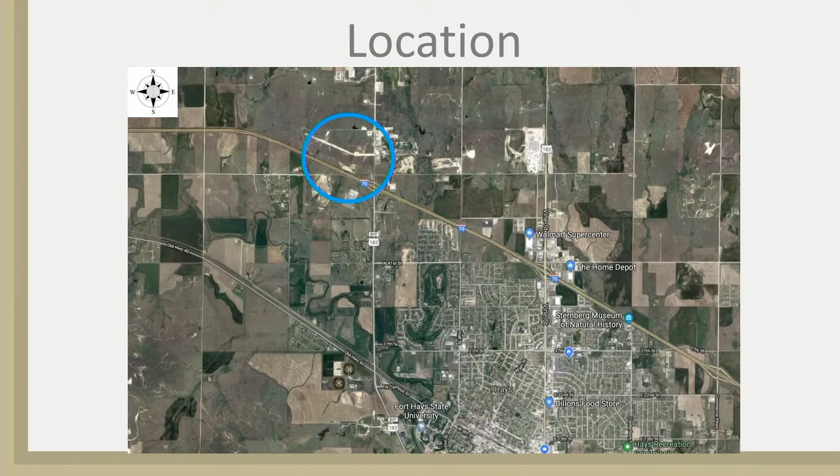Good evening, Jesse Rohr, Director of Public Works. This first item tonight I want to discuss is the consideration of the final plat of the Hess First Addition. This property is located off of exit 157, northwest of Hays. As you have been through lots of different processes with this property, you'll know that this is the final step in the development process and will allow subdivision of the property. Previously, annexation and zoning were completed by approval of the City Commission.

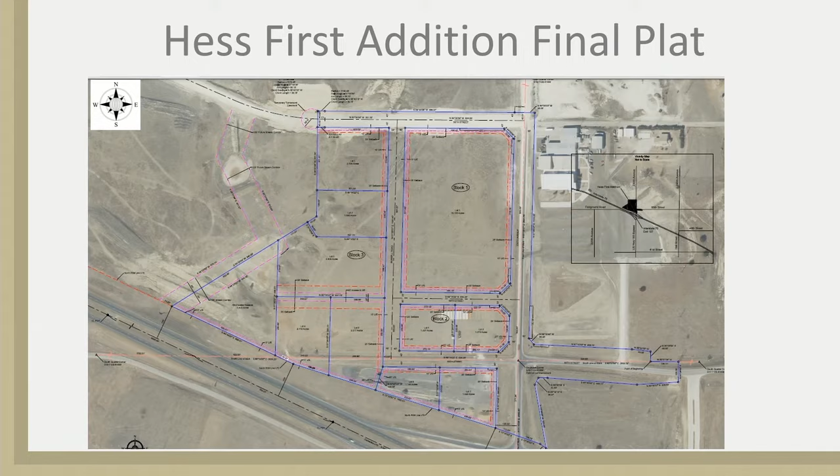The final plat does consist of 10 lots available for development. The plat is designed to allow for commercial uses such as restaurants, hotels, travel centers, and other similar commercial uses to accommodate the traveling public along I-70. The area proposed has been annexed into the city, and when it was rezoned, it was zoned to C2 Commercial General District.

Here's another visual of the property. Without the satellite imagery, the interior streets within the development will be constructed to city standard and accepted by the city for future ownership and maintenance when complete. All easements are in place for future placement of any required utilities.

This plat also shows the area dedicated for permanent stormwater best management practices, or BMPs, down here on the southwest corner of this triangular lot. The stormwater from the developed lots will be directed to this area where it'll be controlled through engineering management design before it crosses under I-70.

This final plat, as drafted, does meet all the requirements of the current subdivision regulations in regard to lot size, setbacks, and all other specific utility requirements.

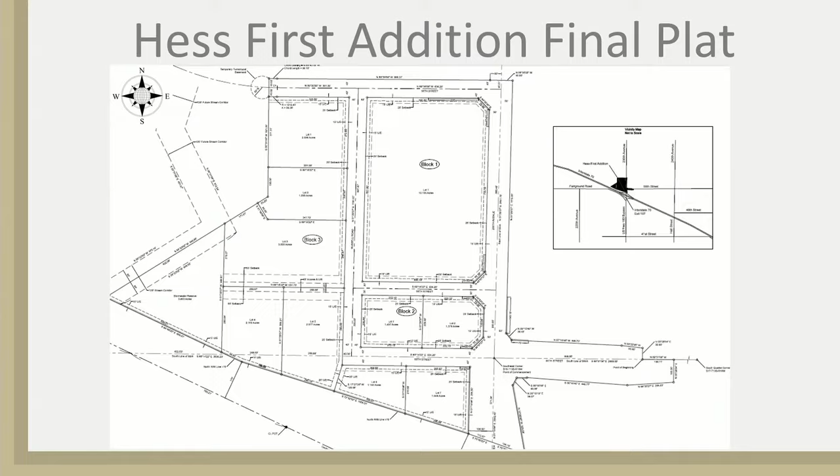So as when any final plat is brought before you, you have these particular options: either approve as submitted, request any further changes or additional considerations to the plat, or do not approve the plat. This plat did go before the Hays Area Planning Commission on January 20th of 2020, and the Planning Commission did approve the plat as submitted and as was recommended by city staff. This will be the action requested, and with that, I will take any questions.

I'll make a motion that we approve resolution number 2020-007, accepting the final plat of the Hess First Addition. I'll second. Motion and a second. Any comments? All in favor of the motion, say aye. Aye. Opposed, nay. Passes 4-0.

Next item on the agenda is slope mower award of bid. The next item I want to discuss is an award of bid for a slope mower for the Stormwater Division. The 2020 budget did include funding for the purchase of a slope mower for stormwater maintenance. This is a picture of the current 2010 Jacobsen mower handed down from the Parks Department a couple years ago. It's made to mow primarily level ground or nearly level ground, and not made to mow the steep slopes that it's been used for the last couple years.

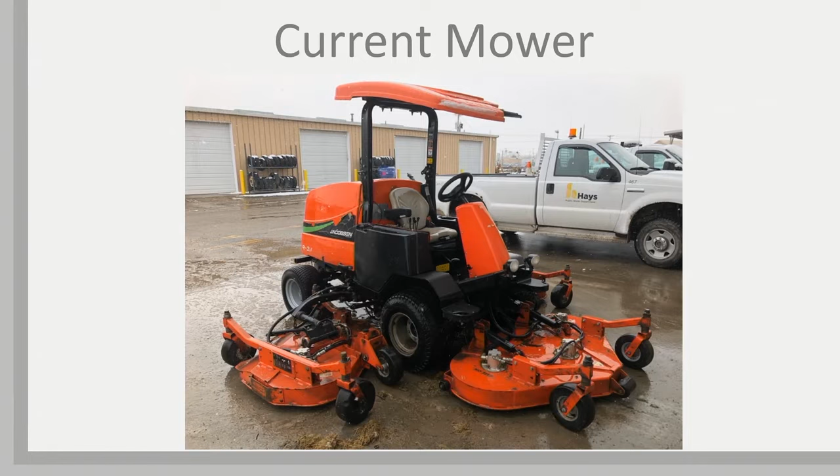Because of this, there's lots of extra wear and tear on the mower in place because it's mowing areas it shouldn't be mowing. It's also not safe for the personnel running the equipment. The plan with this particular mower is to keep it around to mow level areas, the tops of the draws, and other flat areas that are mowed by stormwater.

Throughout late last fall, early winter, staff did demo 4 different units, including the one proposed as pictured here. One of the 4 was a remote controlled unit, and the other 3 required operators on board. All 4 of them were tested in one of the steepest draws that are mowed, Chetolah Draw along General Custer behind the Vine Street Dillons. Only one of the 4 was reluctant to get in the draw and mow the steepest area. The other 3 did, including the remote mower and the other 2 operator mowers.

This recommended mower, what they call the Harper ATM 72 LC, that stands for all-terrain mower, 72-inch cut, liquid cooled, had no issue mowing any of the areas and appeared to be the safest mower of all.

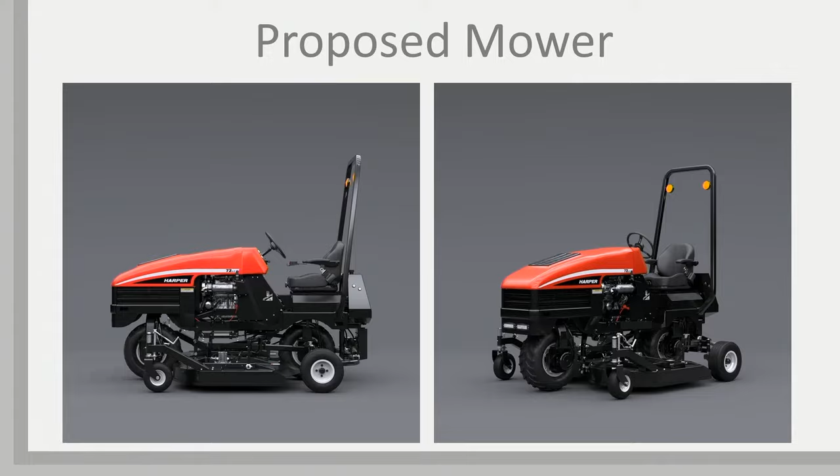This particular mower carries a 3-year, 3,000-hour warranty. It has a liquid-cooled 3-cylinder diesel engine. You can see in the imagery here how the mower itself is kept level when on a slope.

We checked with other jurisdictions that operate these particular mowers and found out Fort Riley actually operates 7 of these units. We also talked to a private contractor who does work for Fort Riley and has his own unit, purchased after one of his operators slid their previous mower into one of their lagoons. They love the mower, they've had no issues with it, it works well for them, it cuts well, and they've had no safety issues like they did previously.

Jesse, I have to comment before you leave this picture. It's the strangest looking thing sitting over there. But the bigger point is the guy driving it. You must get comfortable with it pretty quickly because he's not leaning uphill. Yeah, he's settled in.

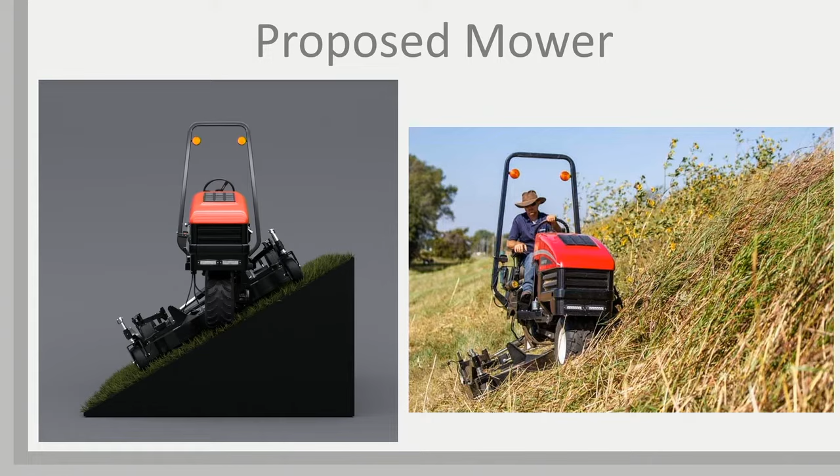Yeah, I agree, and I'll talk about that a little bit more from when our operator actually ran the mower.

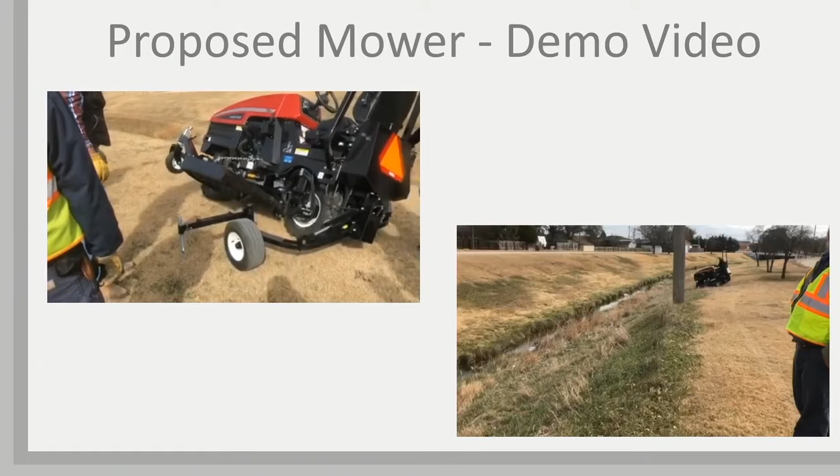This little video clip shows how each deck is maintained. It's actually connected to the unit. It's tilted, and you can change blades and work on the bottom of the deck. Really slick process.

The other image here shows them actually mowing in the draw behind Chetolah. To be honest, it was slightly uncomfortable watching him go down in that draw, not knowing the capabilities of the particular mower. However, the operator had no issues, as you can see, getting down in the ditch.

Eric Borger, our stormwater maintenance operator, also took control of the mower. He got on it, and the learning curve was very quick. He wasn't on there for more than 5 minutes before he got down in the draw.

In one of the other demos we had, the only thing that stayed level on that mower was the seat. It was on a kind of swivel, and the operator said it was like sitting on an exercise ball while trying to run a piece of equipment. Other than getting a good core workout, he didn't feel too comfortable with it. So we felt this type of mower, keeping everything level except the deck, was the best situation for the operator and the machine itself.

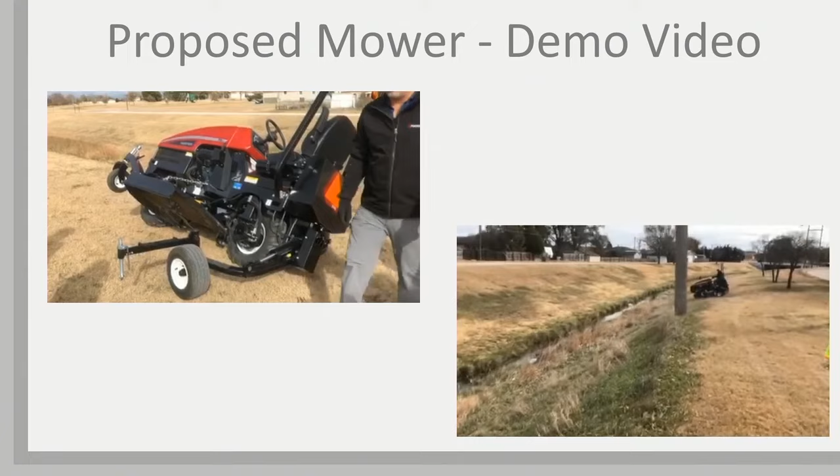There was one qualified bid received, from Great Plains Motorsports of South Hutchinson, in the amount of $46,882.81 for the Harper ATM 72 LC.

In the 2020 budget, we budgeted $70,000 out of the stormwater management operational budget, new equipment line item, and this bid comes in just a little over $23,000 under budget.

I want to mention that last week we had a question about the blades on the mower. This particular mower has 2 sets of blades available: a swinging blade for taller grasses and small brush, and a fixed blade for finer cutting of shorter, thinner grasses. The bid includes 2 sets of each blade, so we'll have the ability to try them both. The contractor in Fort Riley primarily uses the swinging blade, and they're so happy with the cut that they don't even bother with the fixed blade set. But we'll have the ability to try them both and then use whatever works best for us.

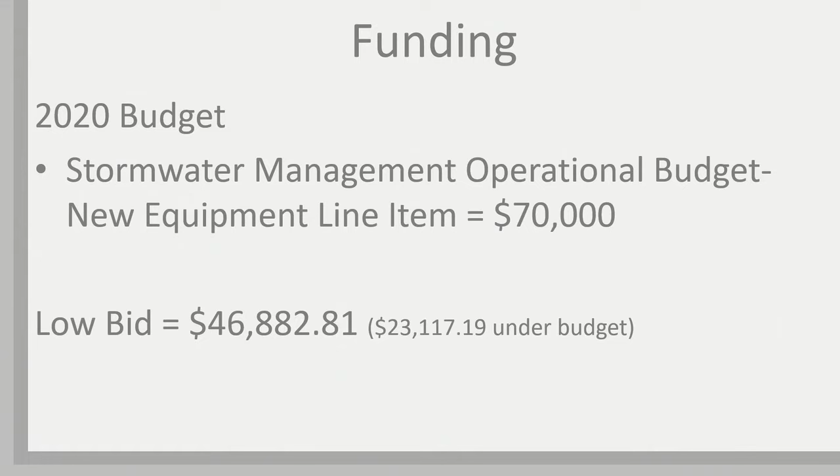Your options would be to award the bid to Great Plains Motorsports as recommended, reject all bids, or provide staff with other options. This would be the action requested.

I move we award the bid for the purchase of a new Harper ATM 72LC slope mower from Great Plains Motorsports of South Hutchinson in the amount of $46,882.81, to be funded out of the stormwater operational budget new equipment line item. I'll second. We have a motion and a second.

Just have a question on the budget, such the gap on that. Were the other ones that you looked at quite a bit higher?

They were. I know one ranged slightly less than this, but it did not meet the bid specs, and that was the one that was actually a little reluctant to go down in the draw itself. When we demoed other units, there were some that got up to the 60,000 plus range.

One of them we had actually looked at last year when we budgeted for this item isn't even made anymore. They weren't selling, and that was closer to 70, so the budget amount is 70,000. We were very pleased to find this one for that budget amount and its capabilities.

Have we bought anything from this company before? I've never heard of it, but I know Public Works has not, and I'm not sure if Parks Department has. They will do all service work out of their location in South Hutch. This brand has dealers all over the place, and South Hutch has this region, so any maintenance will be performed by them if necessary, and they stock the common parts as well.

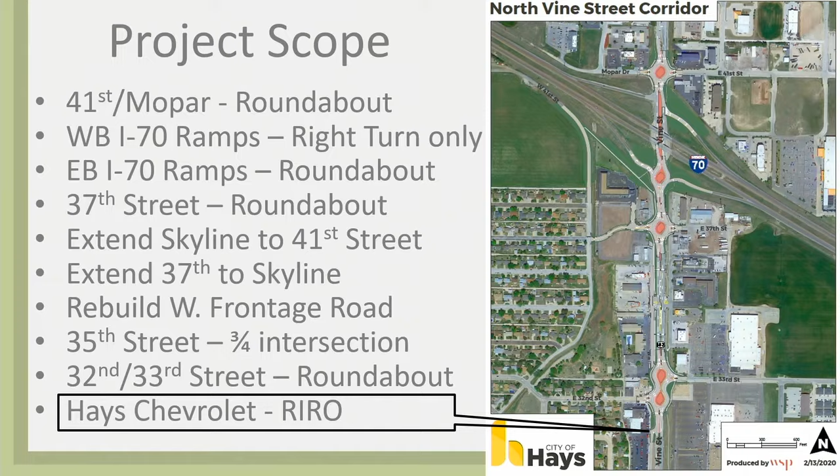As far as schedule goes, the project is currently out to bid with KDOT. There's a March 25th bid opening. If you're so inclined, you can Google bid letting March 25th KDOT and find the project, download the plans, and see who's bidding. It's 405 sheets of plans if you're interested.

Once they have the bids, we'll be coming back in April for concurrence on the award of bid, and there'll also be an agreement for construction inspection at that time. We anticipate construction to begin sometime in May of this year, with construction being completed by the end of the construction season in 2021, November timeframe.

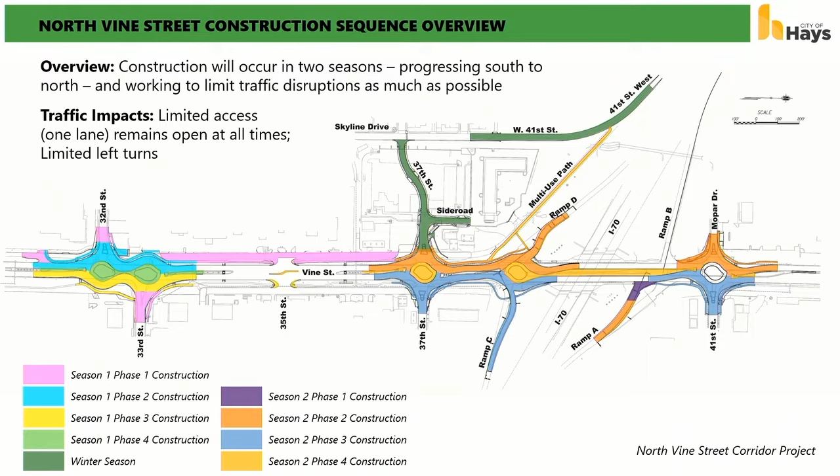The main thing I wanted to talk about tonight is the sequencing of construction and traffic through construction. The project is broken down into 9 distinct phases of construction spanning 2 construction seasons. Season 1 has 4 phases, beginning in May of 2020 and running through November of 2020. Tacked onto the end of Season 1 is what we call the winter phase, which will construct the extension of 37th Street west to Skyline and the extension of Skyline up to 41st Street during that November to April timeframe.

That allows us to do some work during the winter without running the risk of having winter weather impact traffic on Vine Street. If we have to shut down for a month because of snow or extreme cold, it won't affect anybody by doing the work in this area of the project.

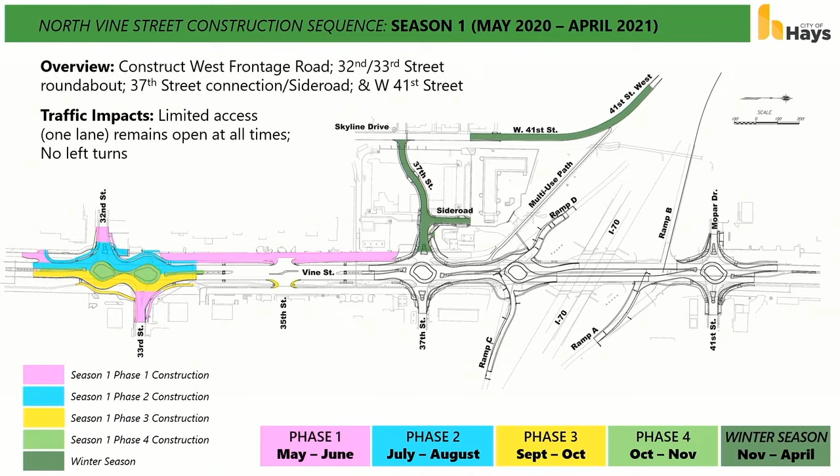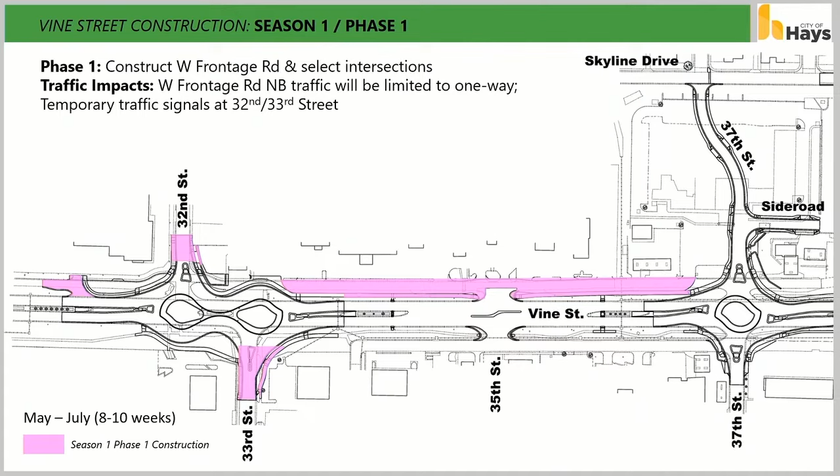So the first phase, which runs from May into mid-July, is approximately 8 to 10 weeks in length. And the first area to be reconstructed is the east side of the west frontage road.

Moving north along that west frontage road, the connection at 35th Street is closed while they're doing the construction.

John? Yes? Can you back up? One more. No, the next one back. Back. There we go. Yep.

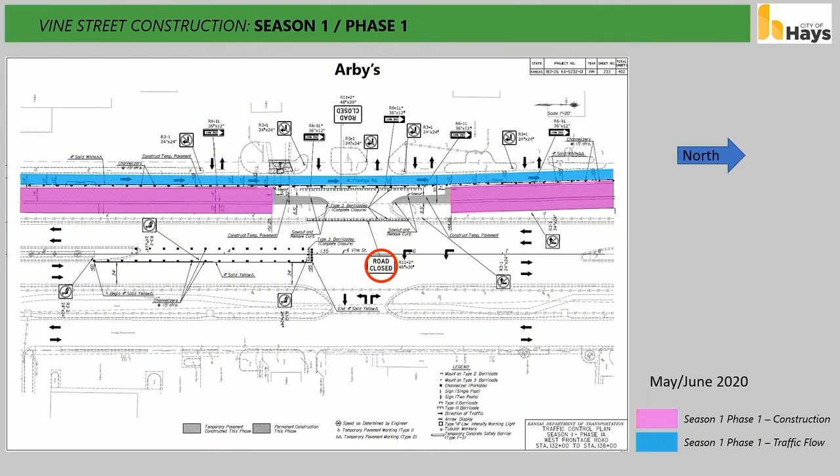So you're saying phase 1, it's going to be one way right there by Pheasant Run. So you got 2 lanes going into one. Is that on the left side they're going to be? Yeah, they will be driving down the left side of the road.

We actually went back and forth with the engineer. Originally we had it one way southbound. But what we discovered is that if somebody wanted to go to Freddy's or Arby's or Whiskey Creek, and they didn't turn back at 37th Street and drove past it, there's no good way to get back. This way, you drive past and say, oh, I wanted to go to Arby's - well, you can go. So we made it this way; it was kind of after the fact, but in the process we originally started the other direction and decided to go this way because it was more forgiving to the unwary traveler. Good point, makes sense now. Thank you.

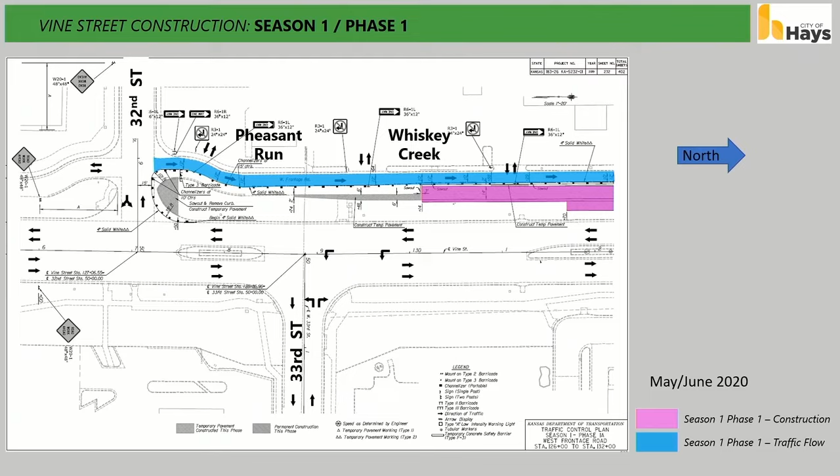Moving on, continuing north toward 37th Street, traffic is still one way northbound, and everything else is normal.

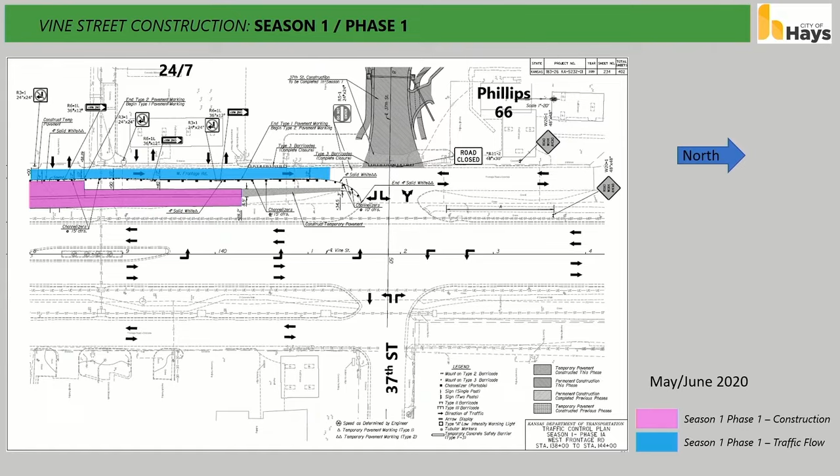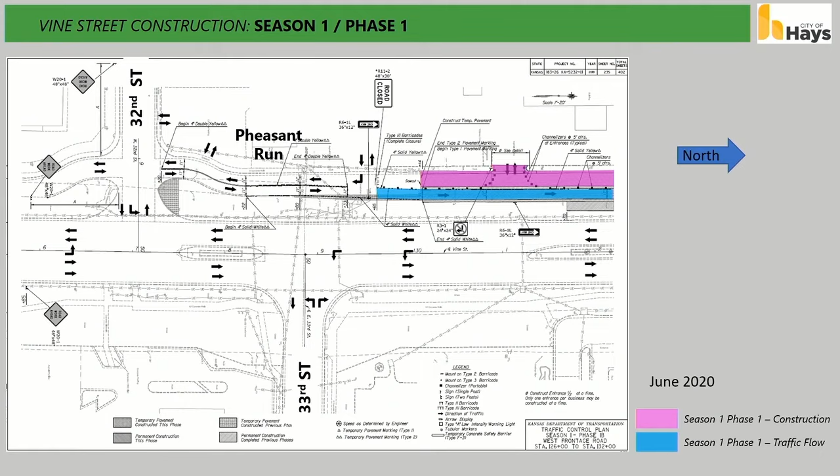After the east side is constructed, traffic will be moved over onto the new pavement, and they'll be reconstructing the west side of the frontage road. Traffic is still one way northbound.

As construction occurs along that, all the entrances to the individual businesses will be phased. It may look like it's being blocked off, but they'll always allow access to get in and out of those businesses, building half entrances or having one entrance open while they build the other, so access is always maintained along the frontage road.

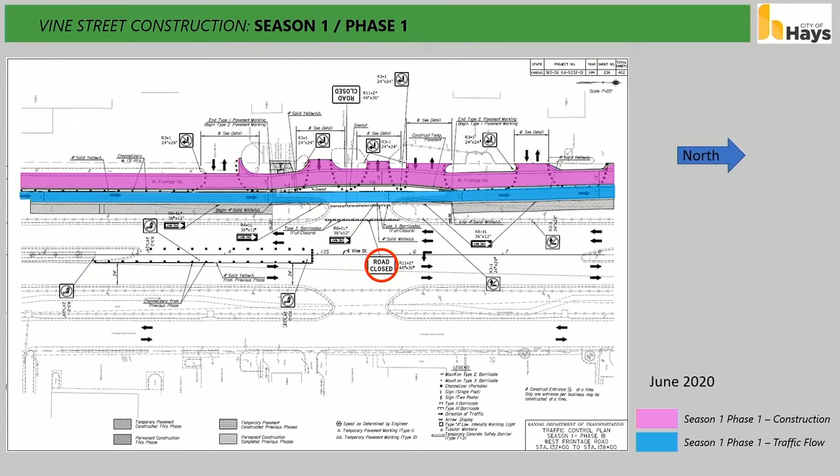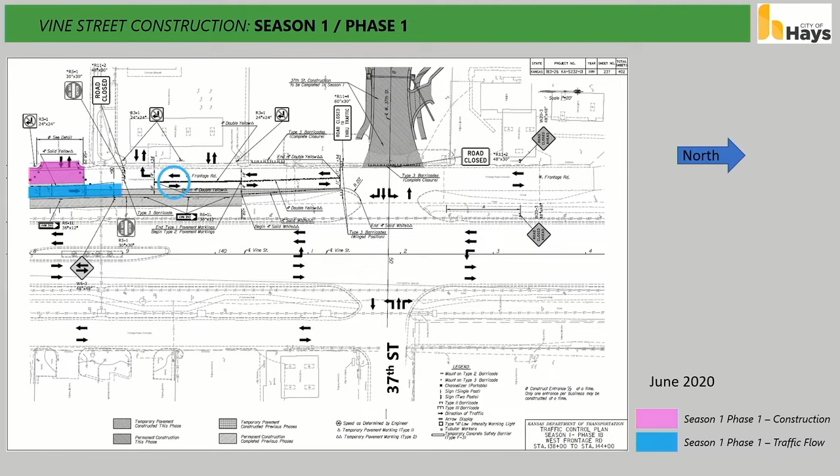During this phase, we do allow a little bit of two-way traffic to access the 24/7 there at the north end of the construction zone.

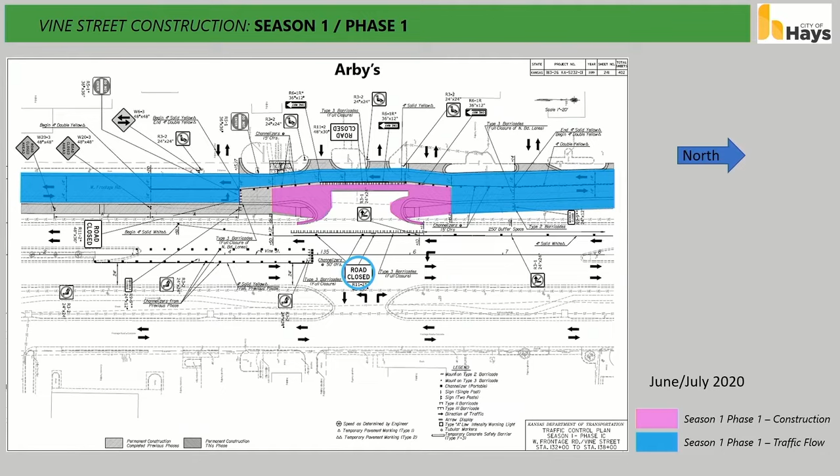The third step in the west frontage road construction rebuilds the pavement right at the intersection of 35th Street, in front of Arby's, widening it out to allow for the eventual three-quarter intersection configuration.

Also during phase one, work begins on the right-in, right-out entrance to Hayes Chevrolet and the disconnection of that west frontage road from 32nd Street.

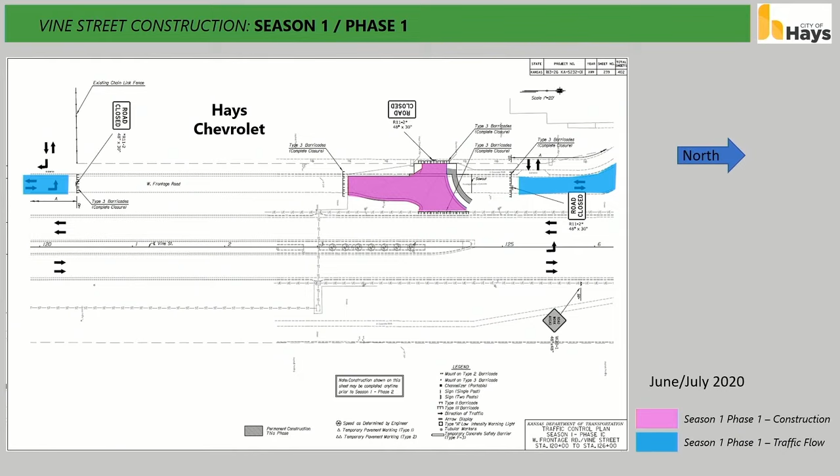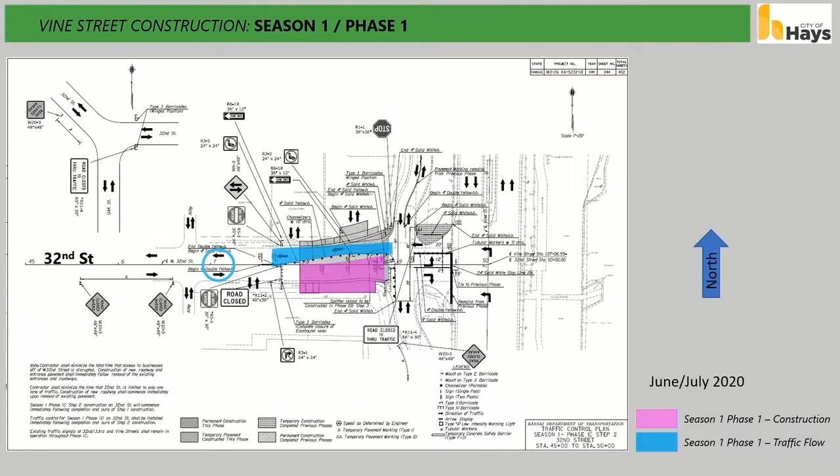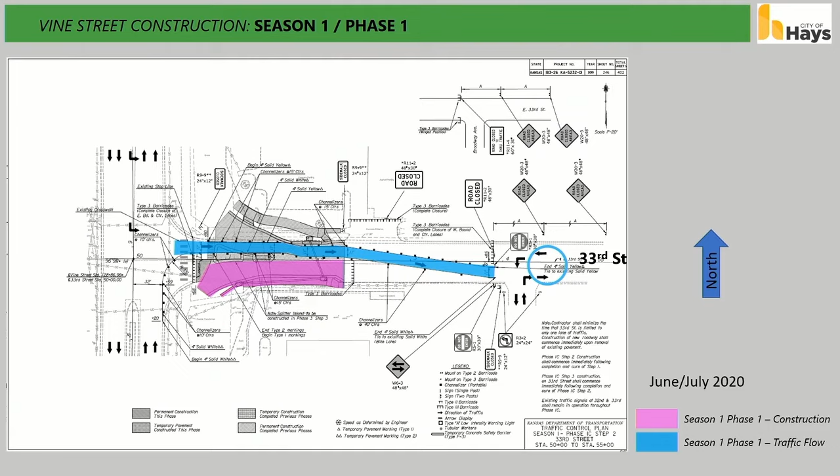The last thing done during phase one, which is still phase one of nine phases, is terminating the west frontage road at the south end there by Whiskey Creek.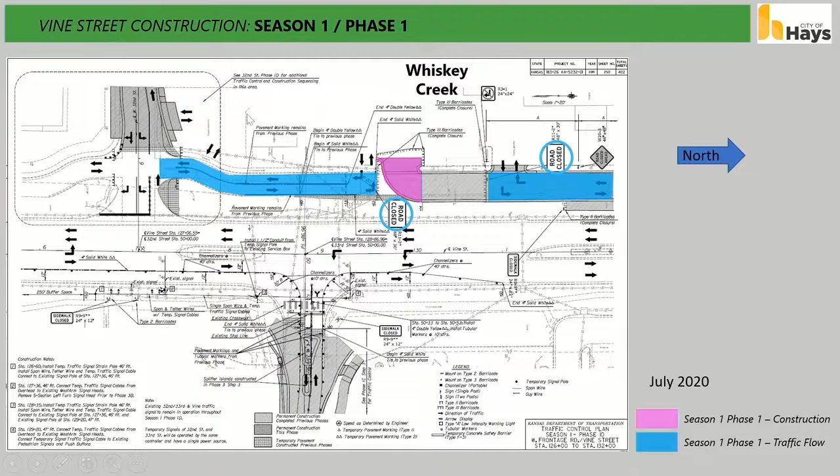Which moves us into phase two. So now we're in mid-July. Lots happened in the last two months, but we're moving out onto Mainline Vine Street and starting to build the west half of the 32nd, 33rd Street roundabout. This phase will take us through August, lasting about six weeks.

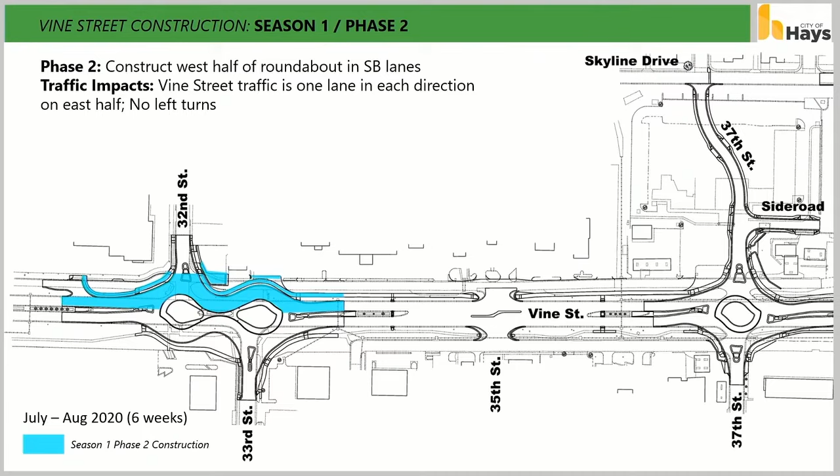This slide shows how the west side of the 32nd Street roundabout will be constructed in steps to allow access to 32nd Street. After the steps shown here, traffic will be shifted to the south onto the new pavement, and that gap will be filled in. During this time, all entrances and access along 32nd Street remains open.

We've got two-way traffic. You'll notice that the Vine Street traffic here now has been shifted over to the east side, so it'll be one lane head-to-head. Southbound traffic transitions over at 35th Street, moves over to the east side. When it gets down to 29th Street, it shifts back over to the west side like normal. You'll also notice there's some temporary traffic signal light configuration there to allow for better flow of traffic at those intersections during construction.

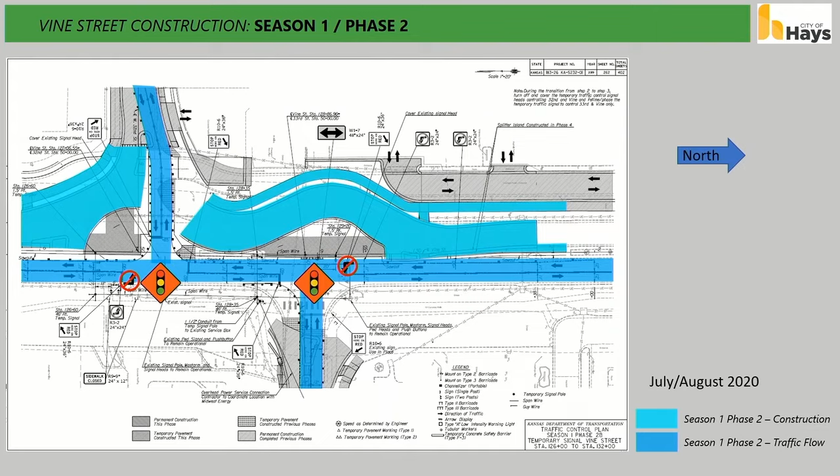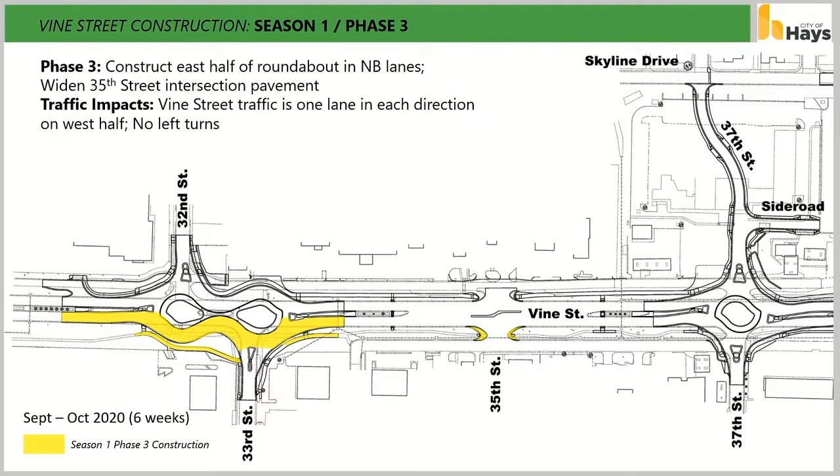After the west side is built, they'll start building on the east side roundabout. This phase will take another six weeks from September through mid-October.

Similarly to how the west side was built, the east side will be constructed in steps, allowing 33rd Street traffic access during construction. Here you can also see that the southbound Vine Street traffic will be running in the outside lanes of the new roundabout, the curvy part, while the northbound traffic cuts through the center on some existing pavement, some new pavement, and some temporary pavement.

The intersections with 32nd and 33rd Street will be controlled with stop signs at this point, and there won't be any left turns allowed. It's kind of obvious how you won't be able to make the left turns during this phase of construction from either 32nd Street or onto 32nd or 33rd Street.

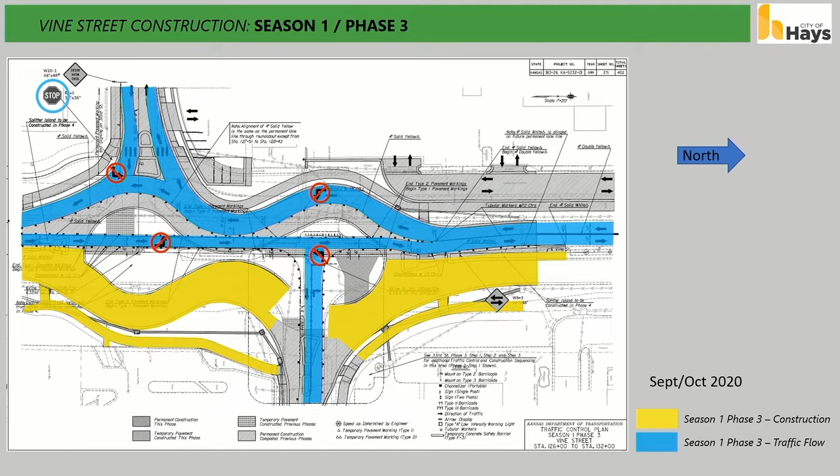That brings us to the fourth phase during season one, which constructs the center islands and the splitter medians. This will take about four weeks, mid-October through mid-November, which would be the November 20th milestone for completion date for season one.

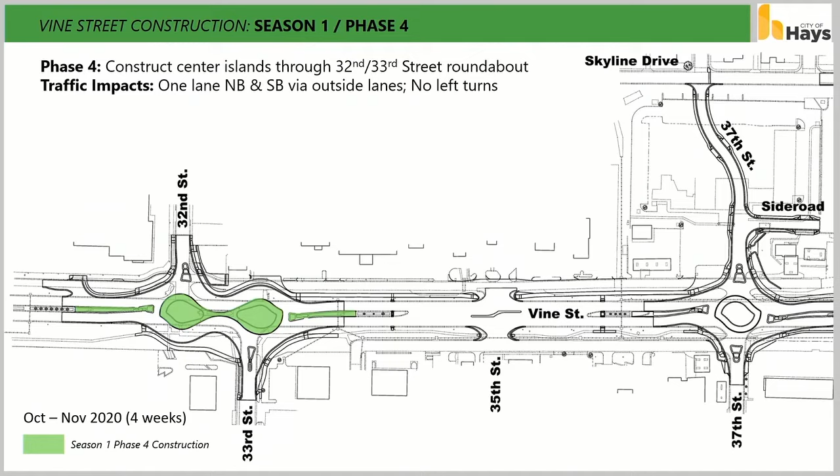Here you can see that during this phase of construction, traffic is split and pushed out to the outside lanes to allow room to construct the center islands. Like the previous phase, 32nd and 33rd Street intersections will be controlled with stop signs, and left turns will not be allowed during this particular phase of construction.

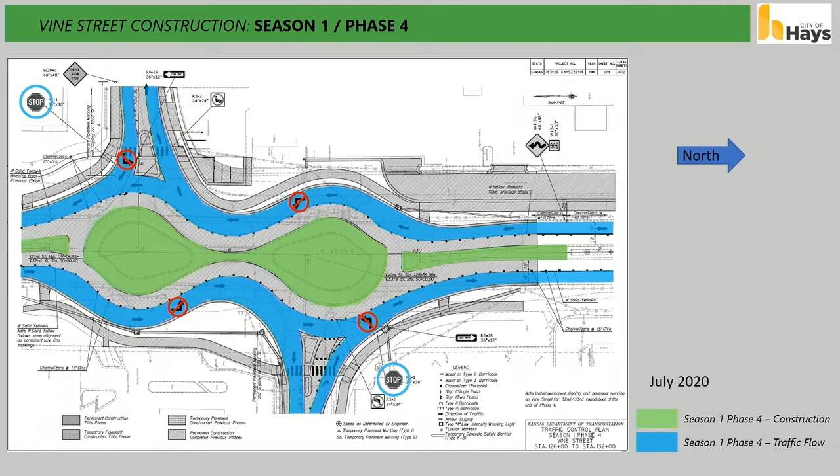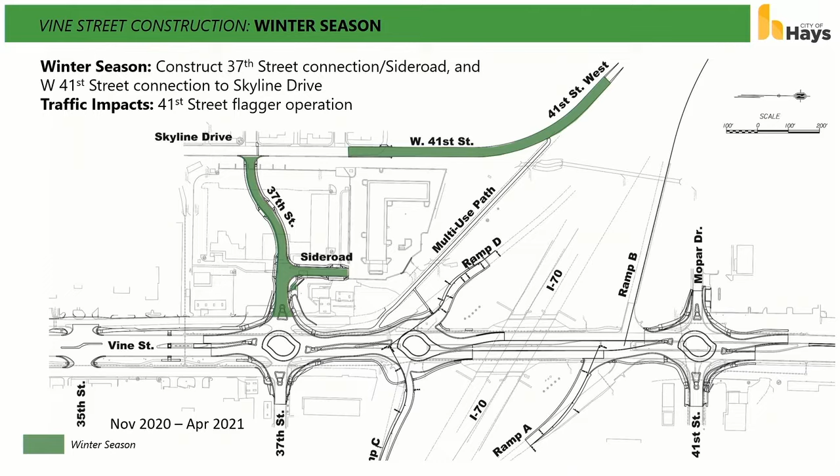After all of the season one mainline Vine Street work is complete, the contractor will begin the work to extend 37th and 41st Street as we previously discussed, November through April. This completes season one and all the winter work, taking us to April of 2021.

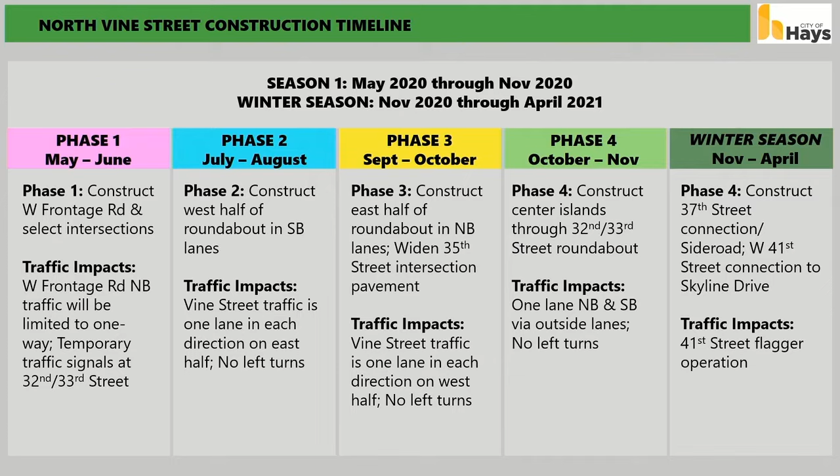I have a question, I can ask it at the end or now. Are you going to do a demonstration like this for all the commercial businesses impacted along this area? We will be having a pre-construction meeting, and I think that could be part of it. It might be something we can handle individually with some businesses. Short answer is yes, whether it's in the pre-construction meeting or a separate meeting. I think this is very important to do as soon as possible with those businesses, because I think back to when we redid 8th Street and got ahead of it with the businesses, and they were able to do signage and make changes. When they had the time to do that and understood where they needed to put that signage, everything made sense.

And I've got a slide at the end of my presentation, but you've also got in front of you the front side of a handout, a flyer that explains it. On the back side will be a detail for every single phase. So as we go along, the front side can stay consistent, but on the back side it'll show traffic control.

My slide shows an example from phase 2 of season 1. Every time the traffic control changes, we'll have a new configuration in the back. We'll have those available, printed out, for businesses to have, and we can provide them to the media to talk about.

My concern is I think they understand what's going to happen, but I'm not sure I would understand the timeline that goes with it even after seeing it a lot. That's really important so they can react. I think there's a lot of positivity on Vine Street, people are getting excited, though there's some nerves, as there would be. If they can get ahead of it with signage, it could solve a lot of that trepidation.

That's a question I have, Joe. We get a lot of travelers that stop in Hays going from Kansas City to Denver, we're definitely a pit stop. If I've never been to Hays and want to get the best pancake in town, or a Freddy's hamburger, how simple is it going to be if I know nothing about Hays to get to these places?

If I drive into Hays and see all this construction, I'm like, oh my God. How are we going to do signage? We did that on Vine Street down by Dillon's, and I remember there were very clear signs.

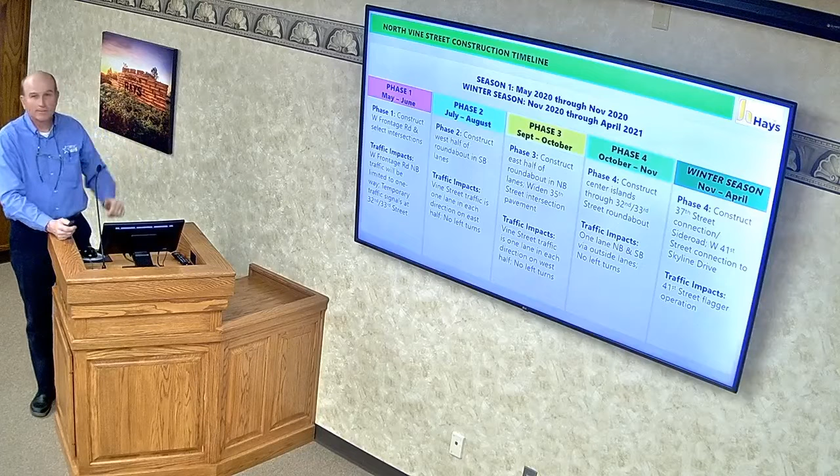So I'll continue on with season 2. There's less... how many slides... seasons, I'm tired. Again, I'm tired. You know, we had a watch party for the show, season 1, or no.

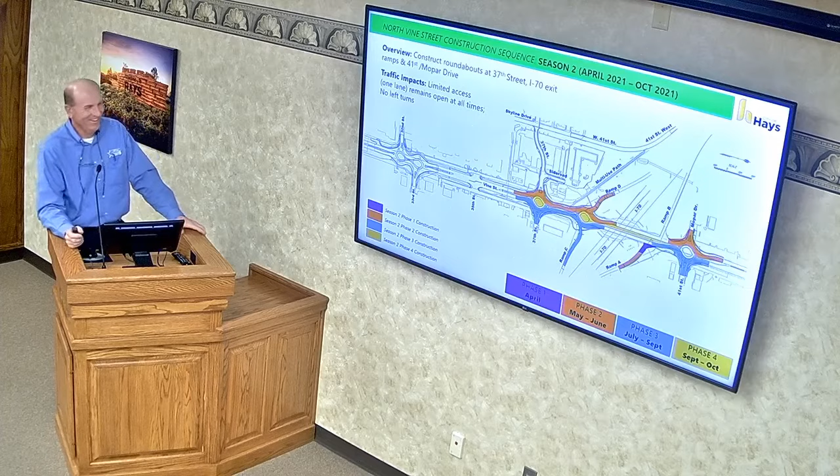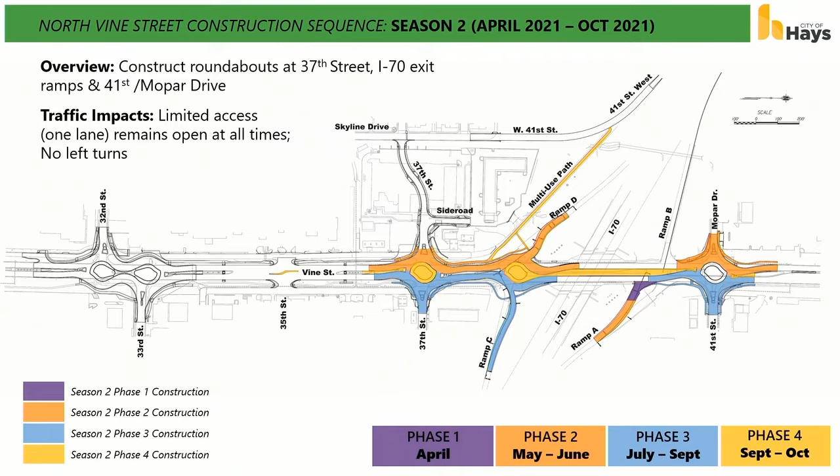Season 2 includes 4 phases as well, concentrated on the 3 roundabouts around the I-70 exit 159 area, and that runs through October of 2021.

Phase 1 doesn't look like much on the map here, but in addition to a little bit of new pavement at the westbound off-ramp, there's also some other temporary work going on at the other ramps and a few other locations. That's preparatory work for subsequent phases.

I want to note that during this whole project, we're not touching the westbound on-ramp, what we call ramp B. All 3 other ramps will receive some level of modification.

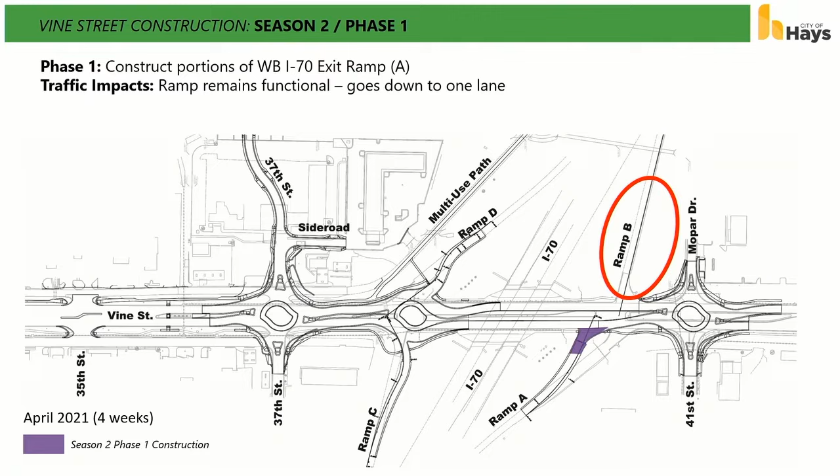Phase 2 dives right into construction of the west side of the 3 roundabouts, and it lasts about 8 weeks, all of May and June of 2021.

This is the north end of the project. 43rd Street is on the right side of your screen, and traffic is reduced to 1 lane and switched over. We'll take out a portion of the median and switch traffic over, so it'll be head-to-head with traffic on the east side as they're constructing. The 43rd Street intersection is still controlled by its signal lights and functions normally.

South of the construction zone, traffic is returned to normal at 35th Street. Northbound traffic wanting to access the east side frontage road won't be able to make a left turn here because of the congestion caused by combining the 2 lanes. So traffic wanting to access these frontage roads will need to go down to the new roundabout and come back, then they can make that right turn into the east side frontage road.

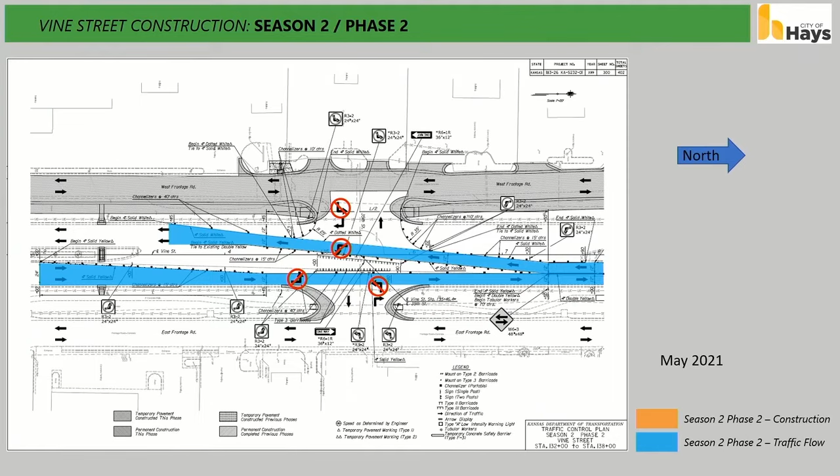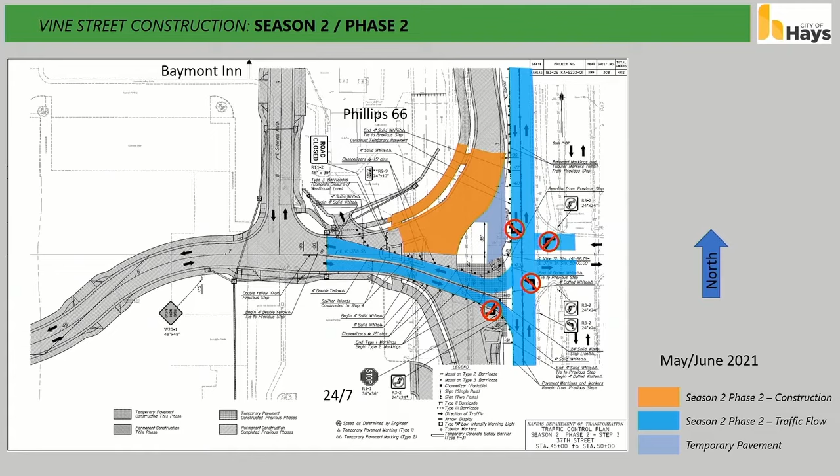The next 2 slides show how traffic is phased through the construction of the intersection at 37th Street. I've rotated the slide, so north is up, but similar to the way the other roundabouts were, we shift traffic around here. We actually allow for both east and west, rather than limiting it to 1 lane, and we can accomplish that in this construction phase.

Then we move north a little bit to the eastbound I-70 ramp, and construction will again occur in steps similar to previous phases, allowing continual access of Vine Street from eastbound I-70. However, since the traffic signal lights will be gone by this time, and due to the disruptiveness of left turn lanes, traffic coming off will have to go down, use a roundabout, and come back to go northbound. Similarly, if you want to get on, you'll have to go down and come back around to make the right turn onto I-70.

Moving north to the westbound ramps at 41st and Mopar intersection, like the eastbound I-70 ramps, left turns will be prohibited at the westbound I-70 ramps. Therefore, travelers desiring to turn left will need to proceed on through, turn around, and make the right turn onto westbound I-70 or southbound Vine, as the case might be.

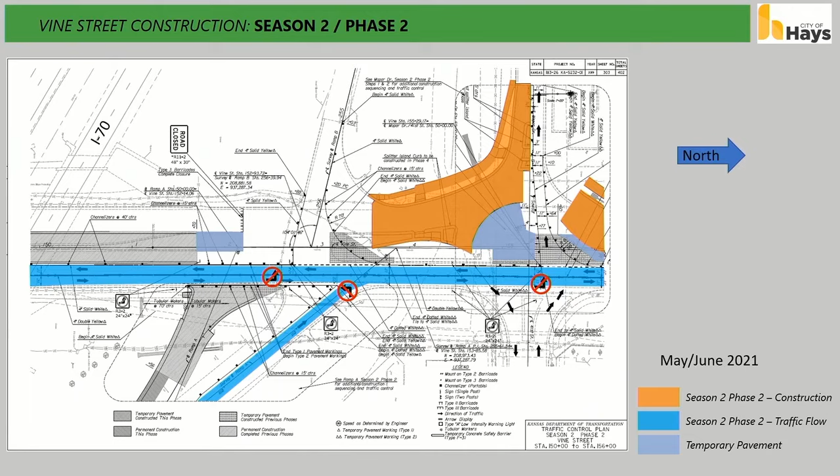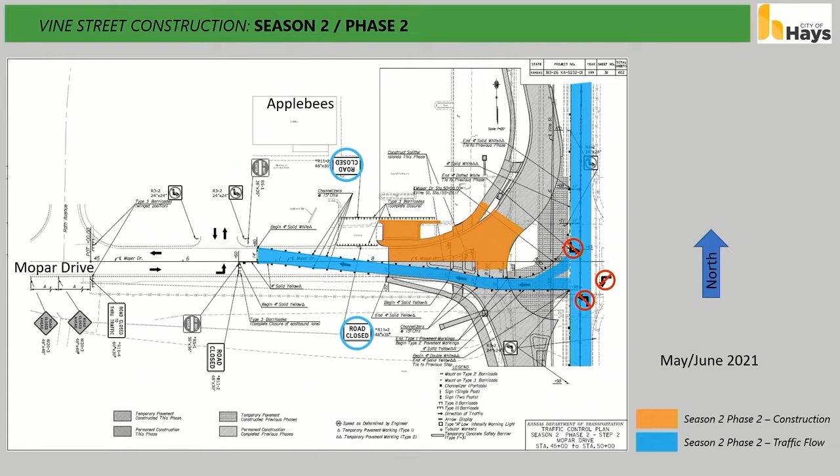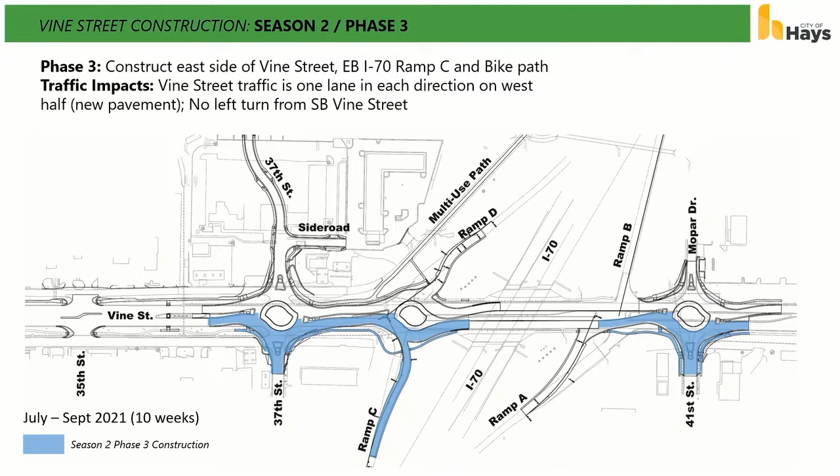To illustrate the construction of the roundabout at 41st and Mopar, north is up here, and we have one way, one lane westbound there by Applebee's. Like I said, it's shifted over during each phase, only one way westbound. Then we move into phase 3, which is July through mid-September, about 10 weeks of construction, which constructs the east side, similar to the west side.

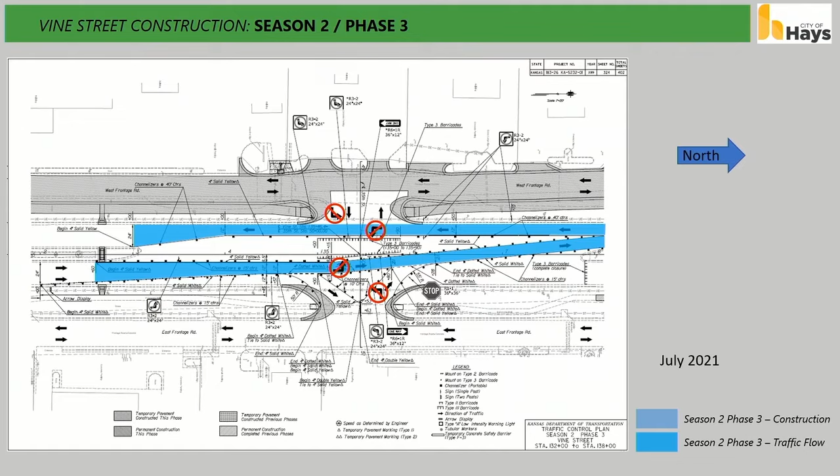Here we have traffic at 35th Street being moved over onto the west side lanes, and again left turns are prohibited through this movement. Then we move north to 37th Street, where it's constructed out in front of the Golden Ox and Super 8. We have two-way traffic, east and west, to the east 37th Street, and again left turns are prohibited.

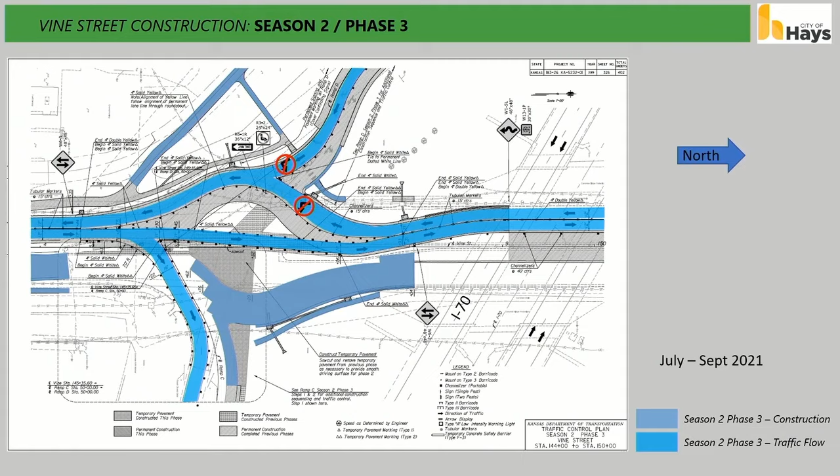So we have walking paths that go across the exit ramps and on-ramps. Will they be lighted in any fashion? I don't see that too often, where pedestrians are allowed to walk across as interstate traffic is coming down off the ramp.

In the ultimate end product, at the roundabout, the teardrop shaped roundabout, they have the crosswalks, they have the yield signs, and it'll be just like any other of the roundabout intersections.

And at the westbound ramp where we have the right turn, that'll be stop sign controlled, and they'll have the crosswalk with the stop bar. But no, they're not lit or push button activated. So the I-70 traffic either needs to stop or yield at the roundabout.

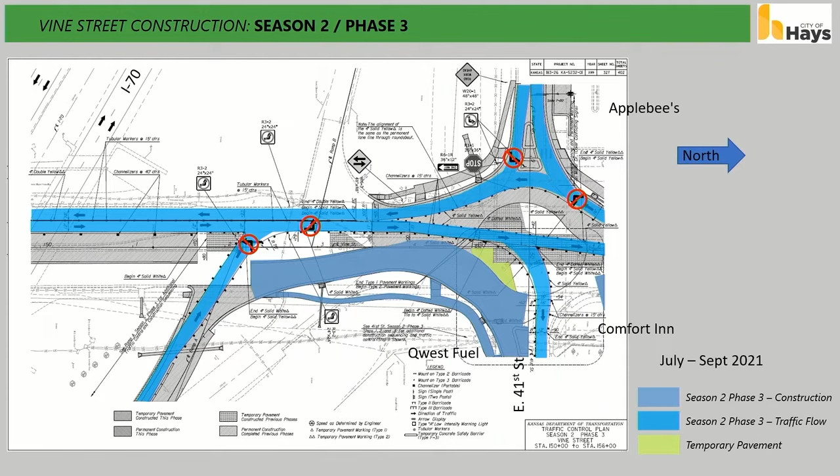So this is the right turn at the westbound off ramp, building the east half of the 41st and Vine roundabout.

Here we have a reorientation of the slide showing that area of 41st Street east of Vine by the Comfort Inn and the Qwest Fuel. We have one lane of traffic eastbound while they're building the south half of that roundabout, and it switches over onto the new pavement on the south side as they're building the north half of the roundabout. It's still one way eastbound, but all entrances are open, all access is available.

During these phases, entrances to Comfort Inn and Qwest Fuel are reconstructed, but both of those businesses have alternate exits or entrances to the east.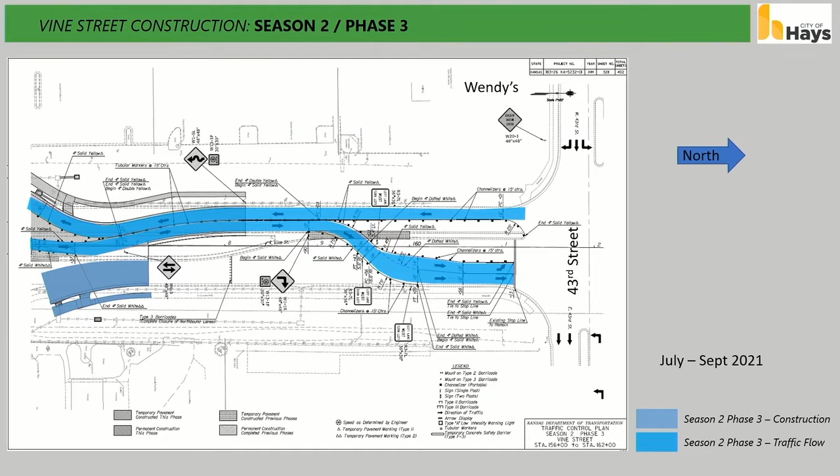Finally, we move into the last phase, mid-September through mid-October, approximately 4 weeks. It constructs the splitter medians and the center islands of the 3 roundabouts. The multi-use path on the old 41st Street alignment would also be constructed toward the end of this phase.

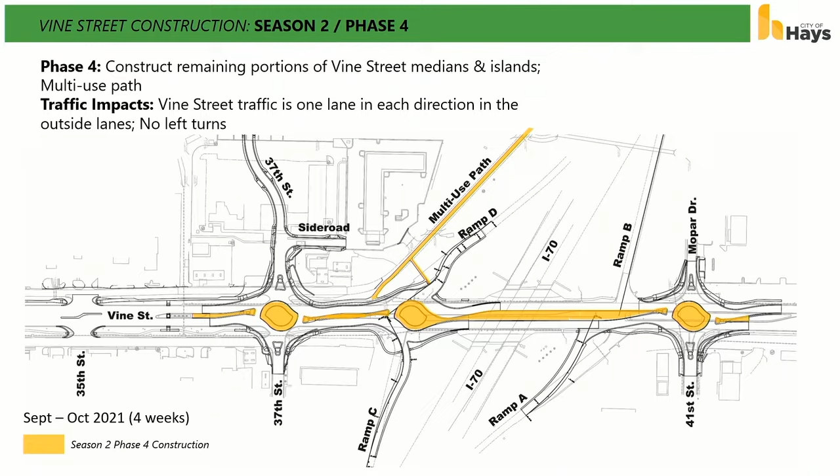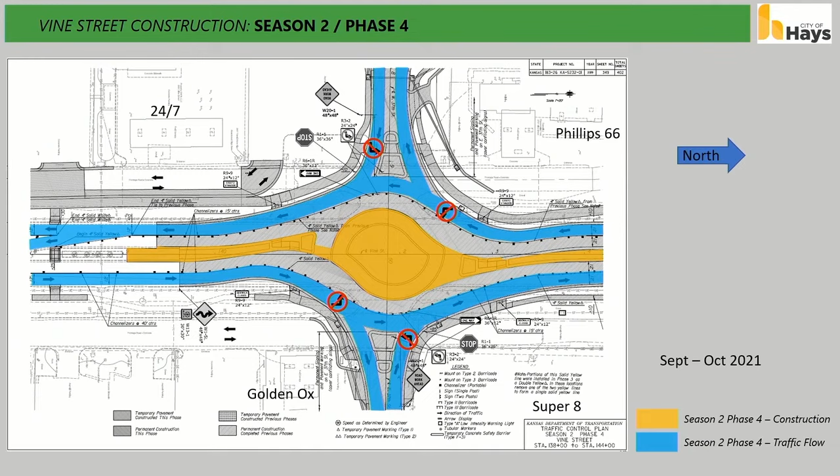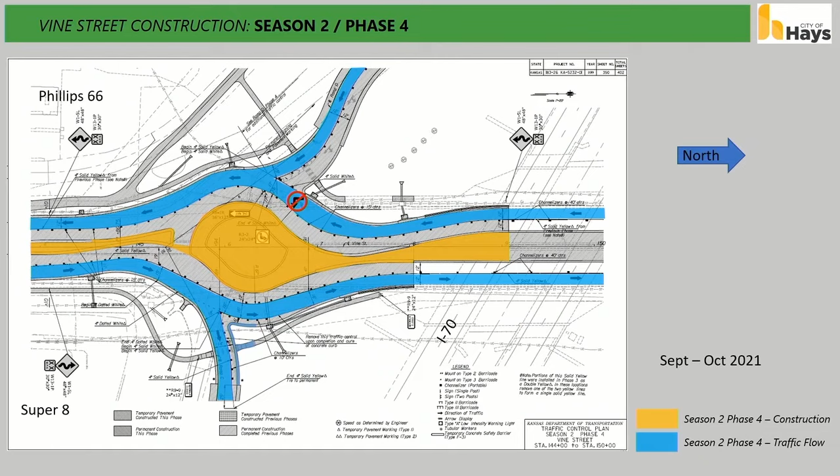Moving south to north, beginning at 37th Street, Vine Street traffic is 1 lane in each direction in the outside lanes of the new roundabout. 37th Street traffic is controlled by stop signs, and left turns are still prohibited. Moving on down to the eastbound I-70 ramp, it's still carried in the outside lanes of the new roundabout, with still no left turns. Then we move toward the westbound ramps and the 41st Mopar roundabout.

Similar traffic control scenario with 1 lane northbound and 1 lane southbound.

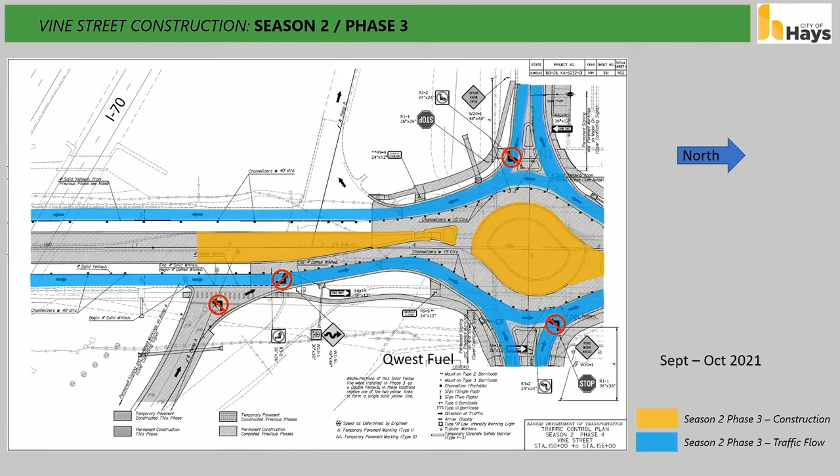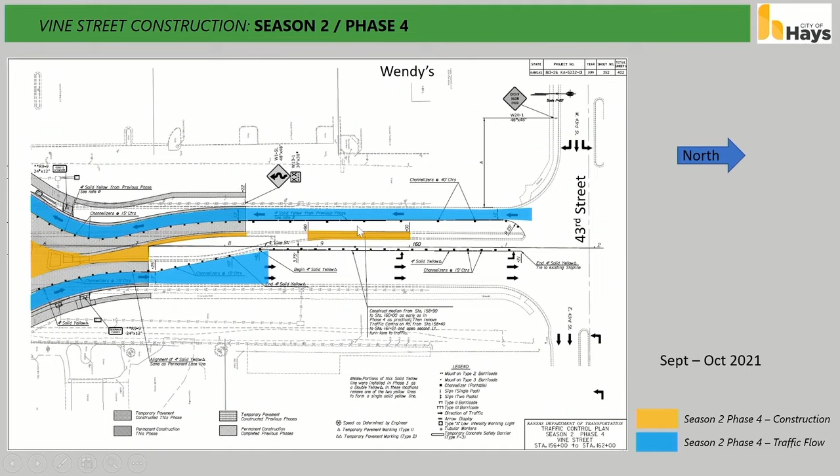North of 41st Street and Mopar, traffic returns to normal prior to 43rd Street. However, the inside left turn lane here is closed off to allow space to restore the median that was previously used for crossover traffic. Then the last piece of the puzzle is to move back down to 35th Street, by Hickoks and Arby's, and construct the median island that creates the 3/4 intersection at that location.

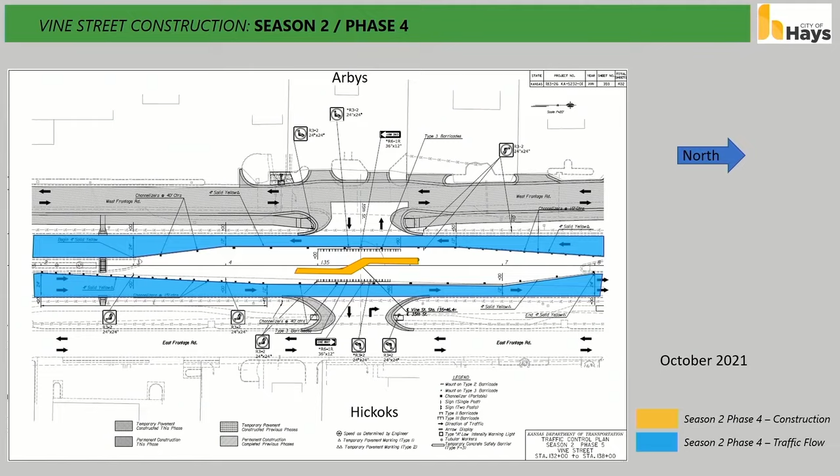So by the end of October 2021, the project is substantially complete. The contractor will still have about 30 days for cleanup and punch list items, but that work should not have significant impact on traffic.

My caveat is this is the construction phasing plan as designed by the engineers. Whatever contractor is awarded the bid will review the plan and may offer input to improve upon it. If they have suggestions, we definitely want to hear that. But we'll want to make sure that following this plan, they always allow the most access to businesses as feasible, and access to all businesses at all times.

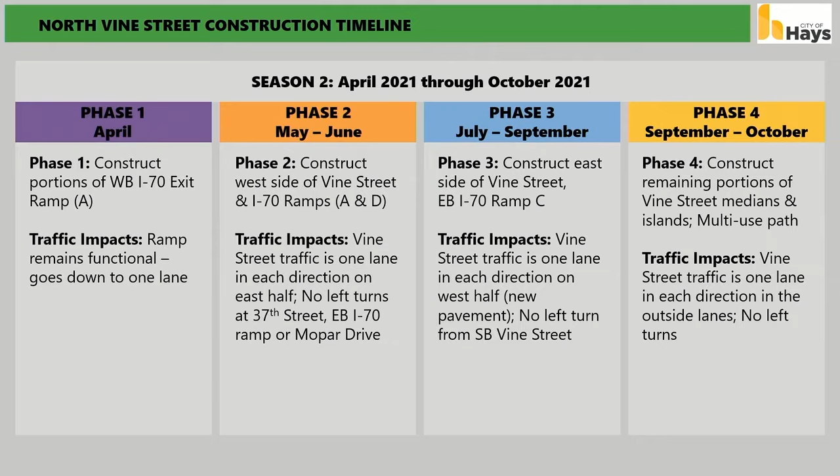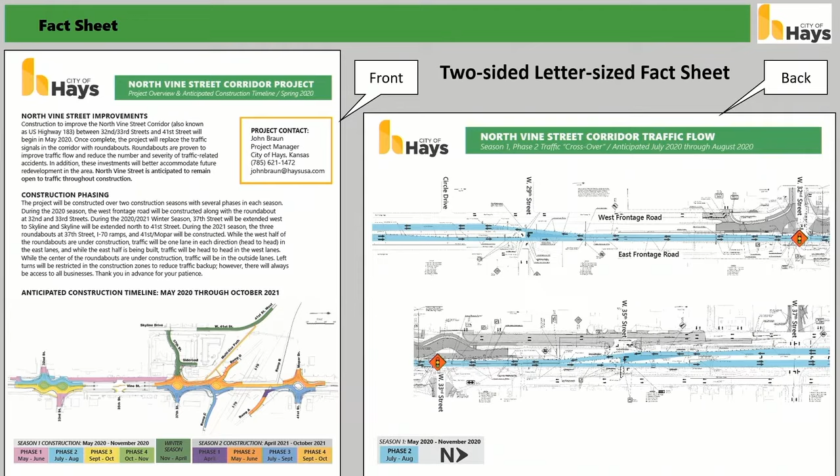I mentioned the flyer earlier. You have the front side in front of you. On the screen, I show a sample of what might be on the backside, showing the traffic flow during any particular phase. This demonstrates phase 2 of season 1. This fact sheet sample is on the project website right now, and it would be updated as we move through the various phases and be distributed to media and stakeholders along the project.

For the benefit of the public, there is a specific web page for this project on the city's website, haysusa.com. It's right there on the home page, a place you can click on to take you to that particular web page. And I would stand for questions if you have any more.

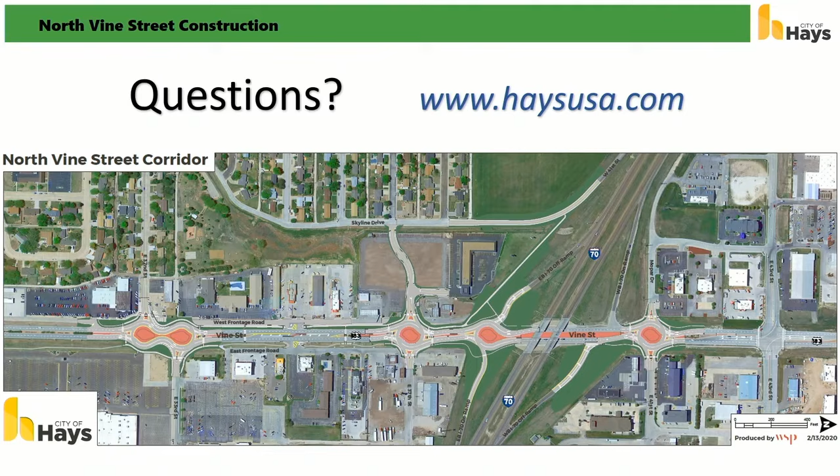John, on the roundabouts on the center part, how much higher are they going to be than the road? Not a whole lot. There'll actually be two transition areas. You'll have your normal driving lanes, then a truck apron, so when trucks are turning they can get up on that, and that's about 3 inches higher. It's a mountable curb. Then from that truck apron to the center island is another 3-inch curb. So theoretically you could drive over, it won't be comfortable and it's not allowable.

The center islands are graded to drain, they're a little bit domed. That'll all be concrete. Will that be a different color? Yeah, they'll be similar to what you're seeing on the screen. It'll be a dyed, stamped concrete.

Also, when we take out the stoplights, what will we be doing with those? There'll be salvage on the stoplight. I think some of that will be able to be reused on the temporary configuration with some of the heads and stuff, but the poles and the lights are salvaged to the city.

On that transition or the turning at 35th there, will that be 6 inches high to separate the traffic? Right, that'll be similar to the median curbs that are out there now. Okay, so you wouldn't be able to drive over or roll that. Okay, good, good.

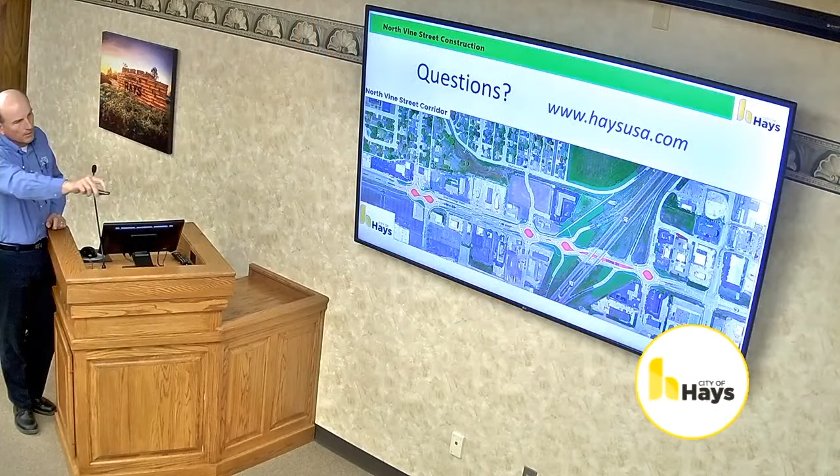John, I spoke at a group the other day about these, and they asked me a question - I think I answered this right - there will be no trees or grass or anything in the middle, correct? And what will we do with the trees that are there now that are growing? Do you know that answer? There are a few, they're not large, they get in the area by 41st, right up here that'll come out. Parks Department is going to go in and salvage stuff ahead of time, so they'll be taking out everything that has an ability to be reused. They'll be doing that, because there's a lot of those big rocks up there too that'll be coming out.

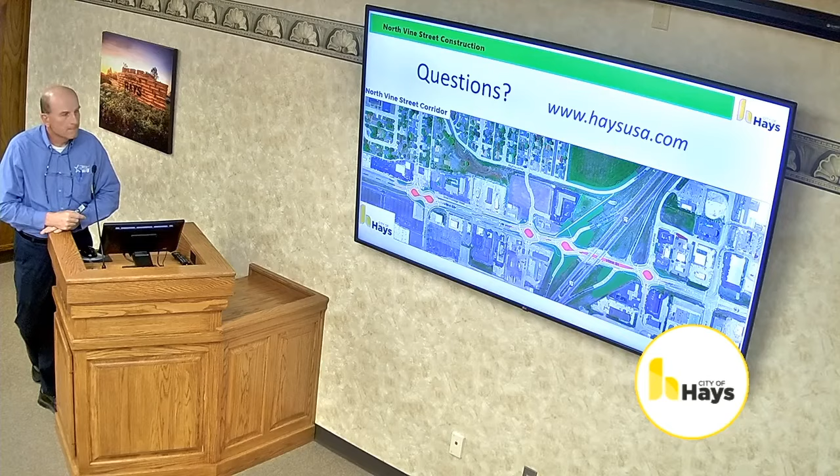Burgess: Congratulations to Hays High for advancing in the playoffs. I'm not sure how that's going to proceed, but hopefully they do get a game in or two, so congratulations on making it this far. Good game last night. Jacobs: I have nothing, I would agree with you, Mr. Burgess, I was there last night. I plan to be on there tomorrow if they allow us to go. I hadn't been to a state basketball game where somebody actually knew the players - I grew up coaching some of these kids, my kids played travel league ball, and it was pretty awesome. I know they're up against some tough competition, but I hope they have a chance to win tomorrow. It's going to be a long drive there and back, but I'll do it again tomorrow.